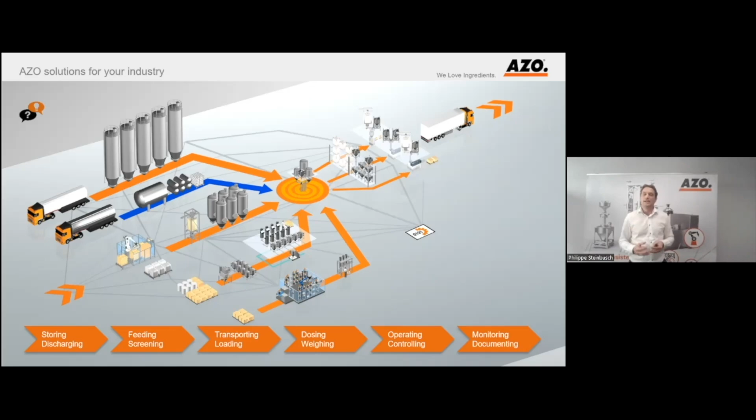So this was a little bit the introduction of AZO. But all these process flows, if we take them to a pharmaceutical application, for example, if you want to make OSD, you have different smaller components, and how can we, for example, use robots to take care of these process lines?

I want to share with you today an application we did for one of our customers. The application was based on this first requirement, which was a special vessel that needed to be filled. We needed to bring it to a mixing system, and then we needed to discharge it. So what were the requirements?

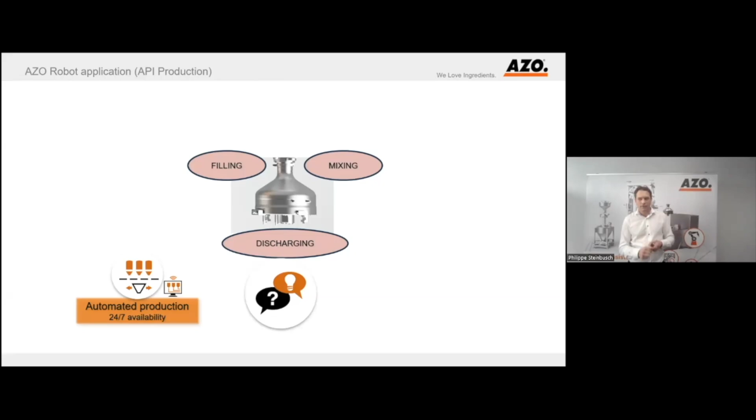First, the customer wanted an automated production. We needed a lot of availability, no stops, not related to operators, and we needed to have really a continuity and a continued production.

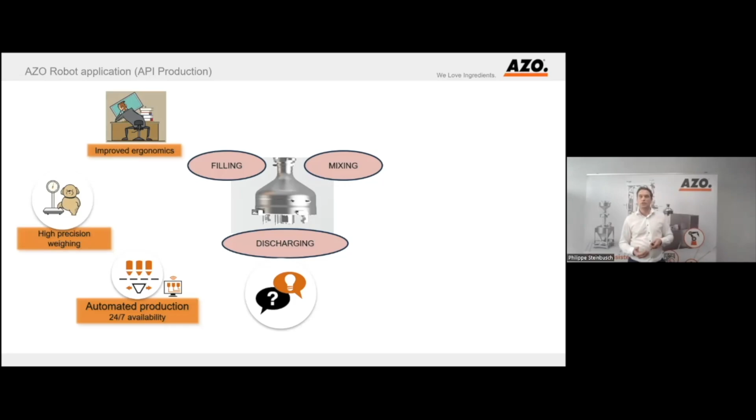Second, we needed high precision. As you know, we are talking about pharmaceutical components, so we need to be careful that the amounts are weighed with high precision. Of course, ergonomics is also important—operators cannot lift too much, so we need to take care of that as well.

The next requirement was containment and hygiene. Most pharmaceutical products are not easy in terms of containment, and often they are also explosive. We need batch integrity, so we need cleaning of the equipment. We need traceability—we need to know what's going inside, what's coming out, and whether it's mixed correctly. And finally, the software needs to be compliant according to GMP regulations.

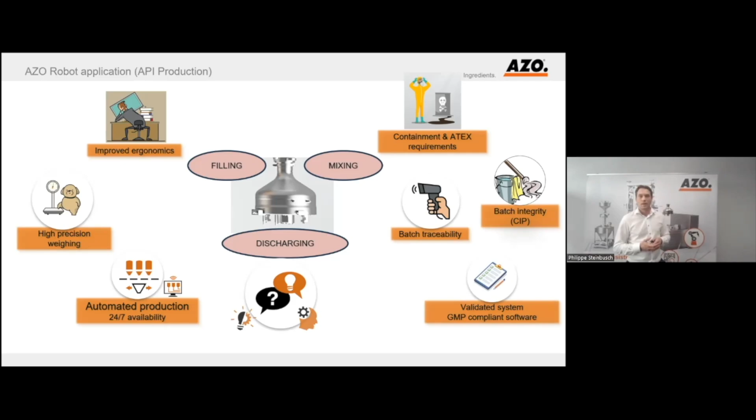So what was the idea? We had this vessel, and how were we going to handle it? This vessel is very heavy, around 100 kg, so it's not so easy to manipulate. The idea came to use a robot system to do all the work and to have an automated production.

Before I show you a little bit of detail about the different equipment, I want to show you this video. It was recorded during validation, and I sped it up to show the movement. It's not the real-time movement, just to show which movement the robot performs during the whole production cycle.

Here you have the robot in the middle. He scans—you see a green light—he can scan a certain vessel with a barcode. He takes a vessel and places it on a mixing stand. During that time, he's free and can move around, so he can take another vessel. In this case he scans again the vessel, wanting to be sure he has the right one every time, and places it on another position where, for example, the product would discharge into another position. I will explain later how these different positions work and what they do.

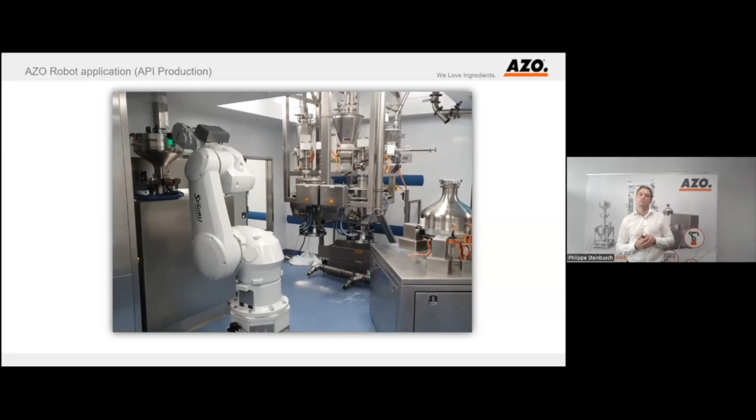Then the robot takes another mixing vessel from another position and can move it freely around. As you can see, you can have different mixing vessels in that area, and the robot takes care of all the movements. Finally, the last movement is that the robot takes the empty vessel again and places it back in the filling position.

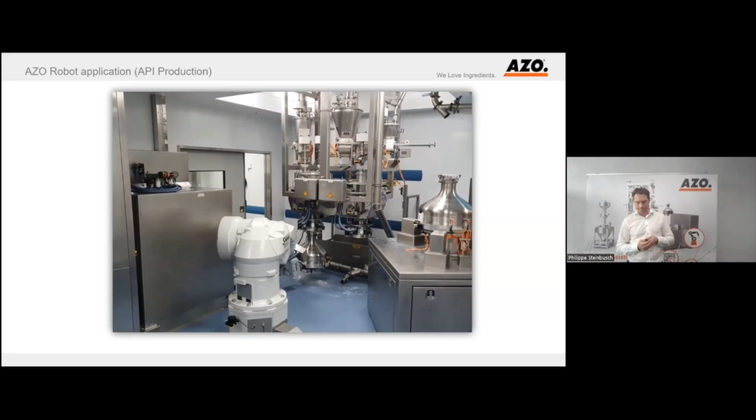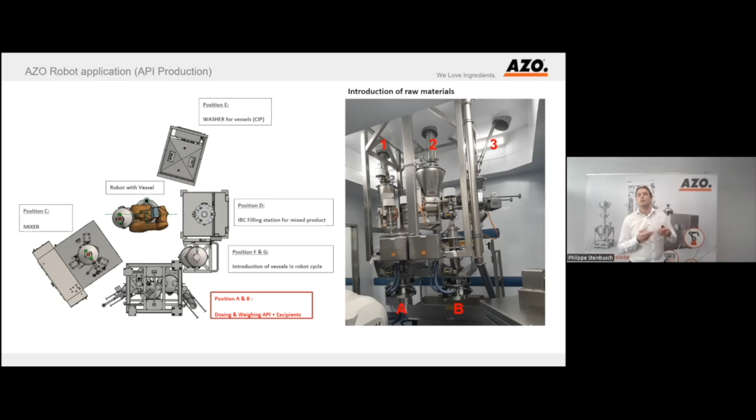So if we go a little bit in detail, we have the different raw materials. We need to add them to the mixing vessel, and in this case for this customer, there were 3 raw materials that needed to be mixed together, marked by 1, 2, 3. And we have 2 filling positions, position A and position B, and the robot can place a certain vessel on position A or B.

These raw materials needed to be dosed, so we used feeders, dosing machines. For example, we have 3 dosing machines that can fill together. 2 feeders can dose in point A, and 1 feeder can dose in point B. And we have a very high accuracy, so these feeders can dose at a 5-gram accuracy or even better.

The feeders dose into a hopper, and this hopper has weighing cells and also an automated calibration system. So before we dose, we calibrate the whole system again to be sure that we have really the correct amount, and then we can dose with a high accuracy. Once the product is dosed, we transfer the whole product into the mixing vessel, which is located underneath.

These dosing systems have very small volumes. As you can imagine, if you want to produce during a certain time, for example a few hours, you don't have enough product in these feeders. We didn't want to make the volumes bigger, because we wanted a very correct amount, a very high accuracy. So we will refill these 3 feeders with chute tubes, located where you see 1, 2, 3. The refill system is located on the level above.

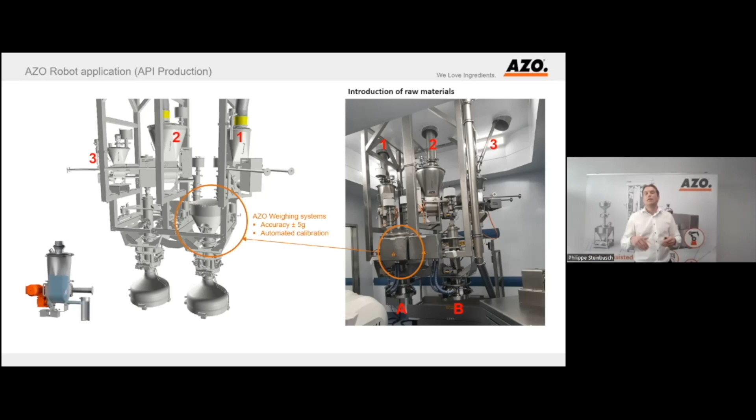So if we look into detail how it looks above on the first floor, we have these different filling systems. We need a certain buffer because we want to have as few operators as possible around taking care of the system, since we need a very high availability, and we also need to take care of cleaning the whole system.

Once the production is completely finished, we can dismantle every product contact piece and bring it to a washing area. But that means also that if you have a buffer, you cannot easily remove it. So in this case, we used an IBC as buffer, placed on a fixed position, and we can completely fill this IBC, which is then the buffer for a certain number of hours. Once it's empty, or when we are finished with production, we just remove the IBC and clean it in a washing street or washing area.

Here you see, for example, that we need to refill them. And usually when you talk about pharmaceutical products, they come in as raw materials, and these raw materials are usually in drums or bags. So we have position 1 and 2, filled from drums. And how do we fill them? Because it's not so easy to manipulate drums.

We have designed a lifting column which has a clamping system. So basically you only place a drum in a clamping system, the lifting column clamps the drum, lifts it, rotates it, and swivels it to the position. And by means of a split valve technology, we can connect the drum to the IBC.

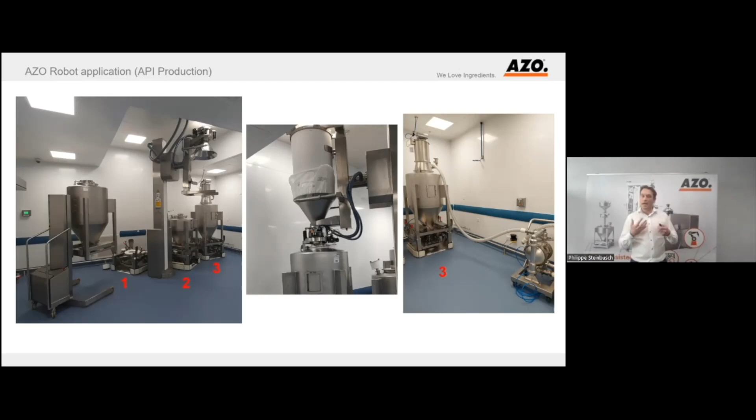The third product was filled by means of a conveying system. So we just take a suction lance and we can empty the bag into an IBC. So this is how the raw materials were managed. Operators have less effort to refill the system, and the system refills itself and doses itself in an automatic way.

We have dosed the product, it goes to the mixing vessel, it goes to the mixer, we're finished, and then we need to empty this mixing vessel into the next step. This mixing vessel was emptied into an IBC, and this IBC can contain 4 to 6 times a mixing vessel. So once this IBC is filled, it gives a signal to the operator, and the operator needs to replace the filled IBC with an empty one.

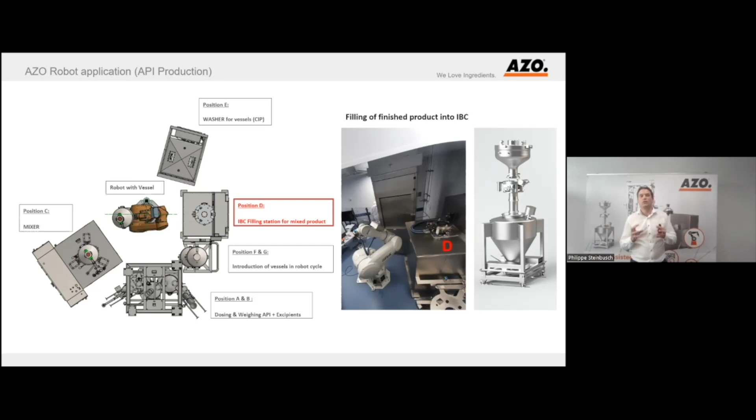So in order to avoid the robot stopping, because we cannot enter the room—the room is completely closed so that no operator can enter—we designed a system to access the IBC without the robot stopping, so the robot can continue cycles. From that door, as you see there, the operator has access to change the IBC. So I have two doors.

The IBC is placed on a weighing scale so that we can monitor how much is inside. And once the system gives a signal to the operator to change it, which happens every 4 or 5 hours, we replace the IBC.

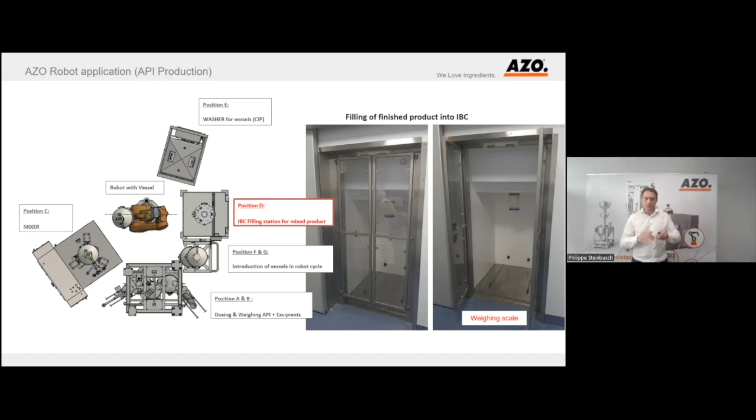Once this is done, of course the mixing vessel—in this case it was a requirement to clean it between each mixing step. Before refilling it again, we needed to clean it, to CIP it. And there also, we cannot have an intervention of an operator, so the robot places the mixing vessel into a washing station.

And this washing station contains also a split valve technology so that it can dock automatically, clean it, CIP it, and then dry it again so that the mixing vessel is ready to use again at the first filling stations, A and then B. So this is the complete cycle of the robot, and he can just do this endlessly the whole day.

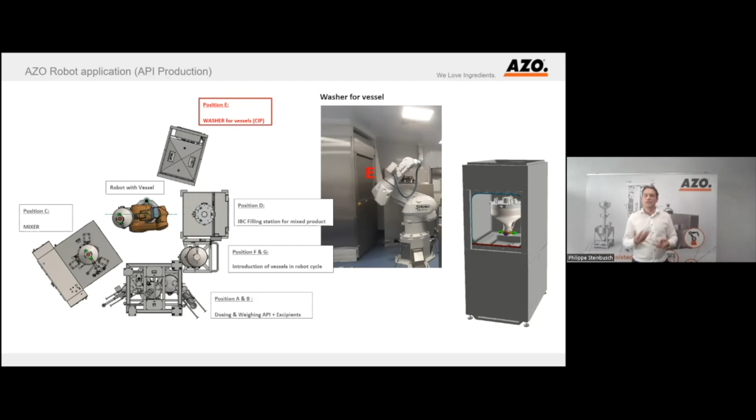What you need to take care of is, of course, that sometimes you can have a non-conformity of a mixing step or a washing step, so you need a position where you can remove a vessel. But also when you start your production cycle, you need to introduce a lot of vessels, so you have a fixed position needed to remove or place new vessels.

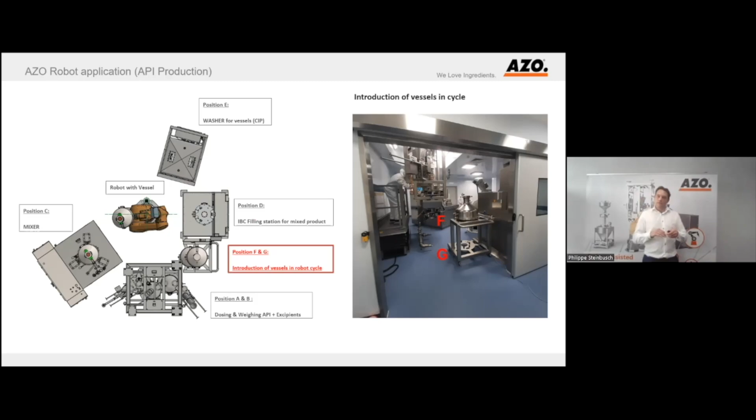So this concludes a little bit the different steps. And if we look into the requirements requested by the customer, we have the automated production cycle, which is okay—all the steps you see here could be managed. So automated production cycle, because the robot does all the job.

We have high precision weighing. We also have an automated calibration system. Ergonomics—the operators only need to place drums on the clamping system or empty a bag with a suction lance. So it's really easy for the operators.

Containment and ATEX requirements: because we have a completely closed system, we have a certain containment level, and ATEX also—it makes it easier because we have ATEX requirements on the inside of the system, but on the outside it's limited because the system is completely closed.

Batch integrity: due to the fact that you can CIP the intermediate mixing vessel after each cycle, we can guarantee a certain integrity, and also we can clean the whole system so everything is dismantleable and can be cleaned separately. So we cover that step.

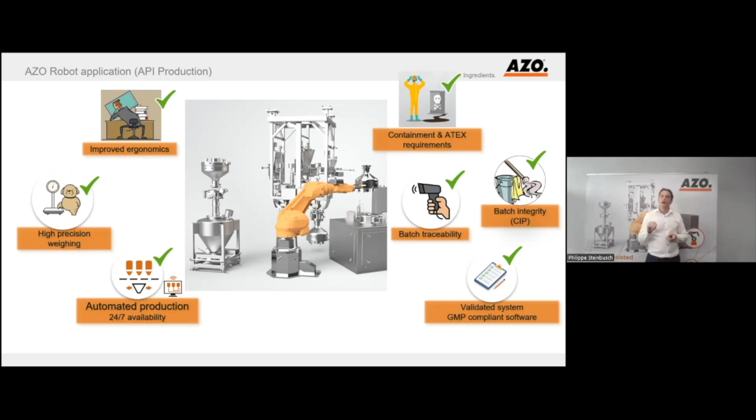Batch traceability: as you could see, the robot has its own scanner on the arm. So at each step, he can scan the vessel and double check if he has the right one and if the movement he does is correct in function of what needs to be done.

The whole system was covered by an AZO automated software, and we are GMP compliant, so the software was 21 CFR Part 11 compliant, so we could cover the whole GMP regulations with that.

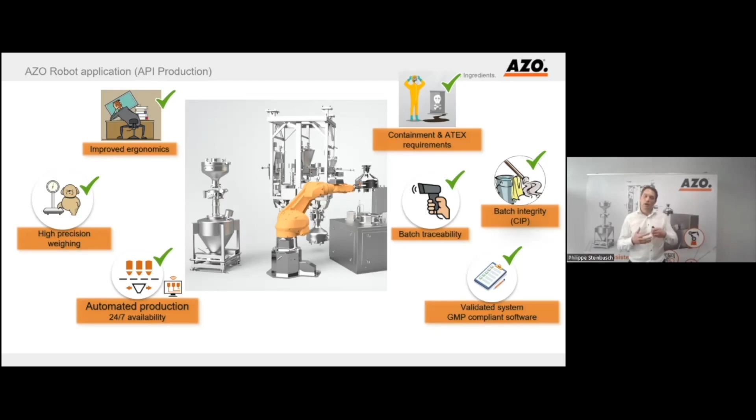I hope I could give you an insight into what is possible in API productions. And of course, this is an application for one customer. As you can imagine, every customer has its own process steps, maybe more or fewer ingredients, another mixing system, another part where he wants to fill or empty the vessels. So everything is possible, but this gives just an insight of what is feasible in the API world.

I want to thank you for the presentation, and if you have some questions, I will try to answer them as much as possible.

Before I jump into the topic of powder rheology, what I would like to discuss is actually not powder rheology as a whole term, but rheology per se, because I expect a couple of people in the audience who are not particularly familiar with this rather exotic field of science. So rheology is the flow of matter of any material, actually. This is what we are studying with rheology. I say any material because really anything can flow. Obviously liquid flows, solids flow and so on, but also powders flow. This is why there's this need for powder rheology.

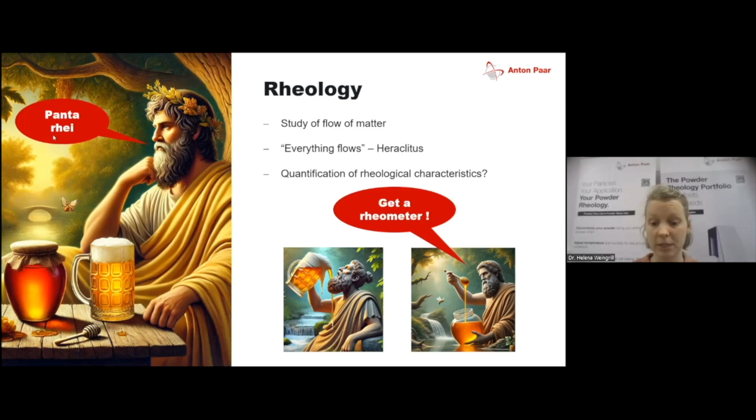However, if you do the same thing with honey, it will also flow, but at a different pace. And this is exactly where rheology comes into play, because here we actually need to quantify these differences in flow behavior. This is where Heraclitus, with his famous saying panta rhei, will not help you anymore, and he would tell you to get a rheometer for quantifying these rheological characteristics. This leads me to my next slide - I would like to quickly explain what a rheometer does. Basically, a rheometer forces a material to move, either in a linear way, in a rotational way, and so on, and it measures at the same time the effort which is necessary to make the material move.

And by measuring that, what we get out is viscosity. Viscosity is this term which determines my flow behavior, and we get many more results. However, viscosity is the most important part to get out. Let's take a look at the hardware, how this is done.

Well, we see our rheometer here. The heart of the rheometer is always its head, because in here we have an engine. This engine, on the one hand, forces my material to move, and on the other hand, it detects the signal, which is then used for calculating the viscosity and other magnitudes. Attached to the engine, we have a measuring system, and this is also of importance because this measuring system will have to be adapted to the material in interest.

I've mentioned that we can measure how solids flow, how liquids flow, and also how powders flow. You can easily imagine that we would need different measuring systems to make a powder flow as opposed to making a liquid flow. Besides those two parts, which are definitely the main parts of a rheometer - the engine and the measuring system - what we can adjust or add as well is the surrounding temperature with a temperature device, a humidity generator.

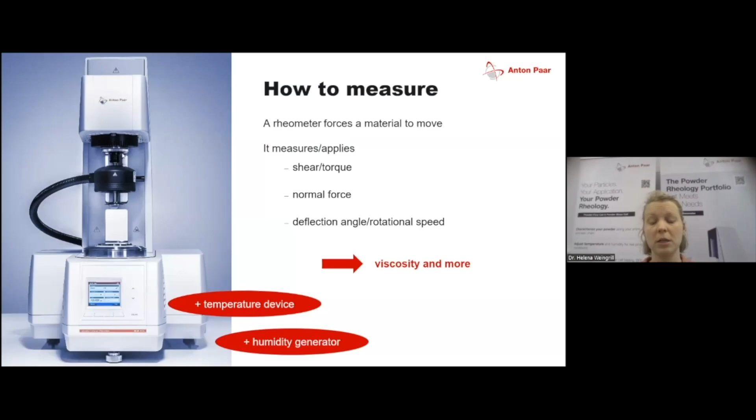And this is one of the most important takeaway messages of today: you always have to set the surroundings during the measurement to exactly what you see during the process. So in general, powder rheology is about imitating powder handling processes. But if you're not setting the temperature right, humidity and so on, the applied pressure, you will never get representative results. So please keep this in mind. Flow behavior heavily depends on the temperature and the humidity the material is seeing. And of course, we can add our powder cells.

So let's actually see why it is necessary to look at the flow behavior of powders themselves. The thing is, there are so many impacts that let powder flow differently. We can categorize them into internal impacts and external ones. Let's start with the internal ones. Those are basically the impacts where we, as powder rheologists, can do nothing about. Those are the given physics from the particles that make up the powders.

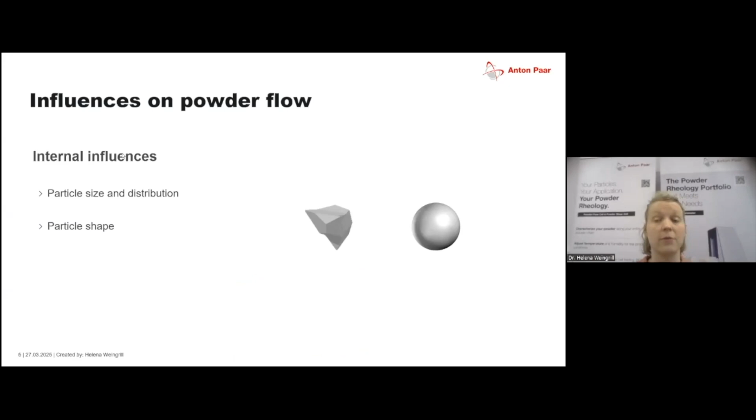Well, there's a certain particle size which impacts the powder flow. Then, of course, the shape. Powder flow is always about friction in between particles. If you think of it, what happens during powder flow? Those particles, they're moving on top of each other, meaning there is friction in between the surfaces of the individual particles. Now you can easily imagine when sliding over particles with edgy shapes like that, there will be more friction as opposed to sliding over particles with a round shape. So this is how we have an impact here on powder flow.

Same thing is for surface texture - it also accounts for the friction in the end. There might be some gas molecules adsorbed to the surface of the particles, also impacting powder flow. So those were now the given things of the powder where we, again, as a rheologist, can do nothing about.

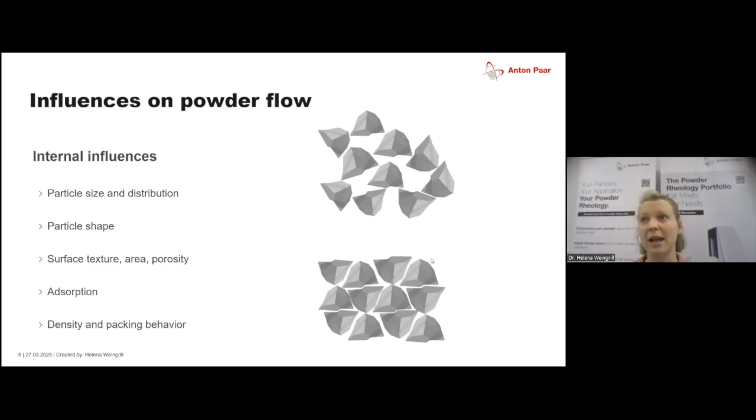But now when it comes to imitation of the processes, which I mentioned - because it's always imitating a process - the external impacts are now the ones where we, as powder rheologists, can really play around to get representative results of my powder flow. For example, the applied stress: what amount of stress does my powder see when it flows? This heavily impacts the flow behavior of my powder.

Then humidity. Just imagine now that these little droplets build liquid bridges in between the individual particles. They pull the particles together, meaning we increase the interparticle forces, which will in return have a huge impact again on the powder flow. So this is something we will have to consider during our powder rheological measurements.

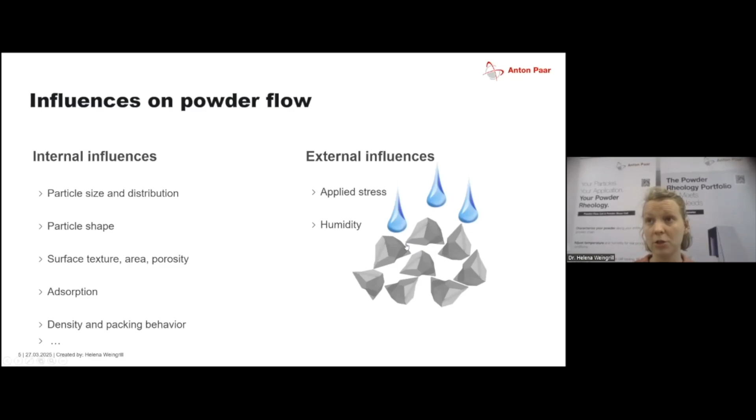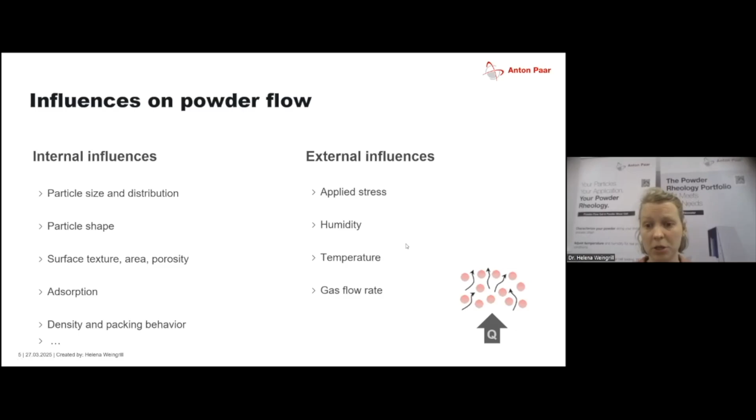Then, of course, temperature. Just think that your powder is, for example, a polymer. You're transgressing the glass transition temperature, the polymer particle softens. Again, this will impact the friction in between the individual particles, which again changes my powder flow. Then also if my powder is fluidized or not, if I'm doing pneumatic conveying and so on. So those are now the external impacts where we, as powder rheologists, can simulate the process.

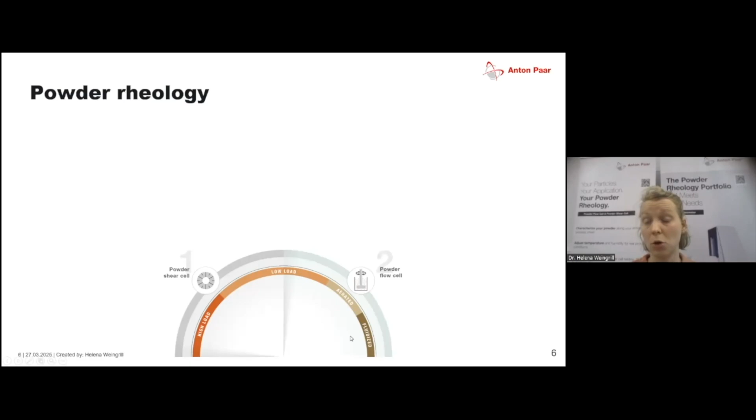We categorize them according to the load of the process we're trying to imitate. So for high load to medium load applications, we have a powder shear cell, classic for measuring flowability and so on, which we will see later. There we can play around with the humidity and temperature.

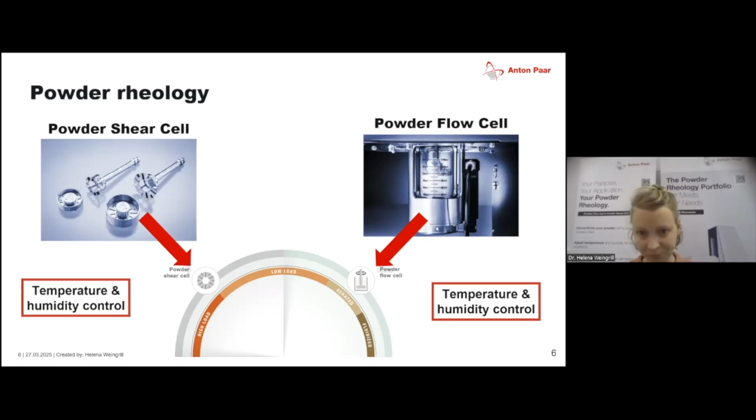Besides that, if we want to go into processes where we fluidize our powder, for example fluidized bed reactor or pneumatic conveying, then we would use our powder flow cell, because here we can nicely imitate the fluidization process. We do that by introducing pressurized air from down below into this powder flow cell. There we can also play around with temperature and humidity to a certain extent to really get representative results in terms of the powder flow behavior.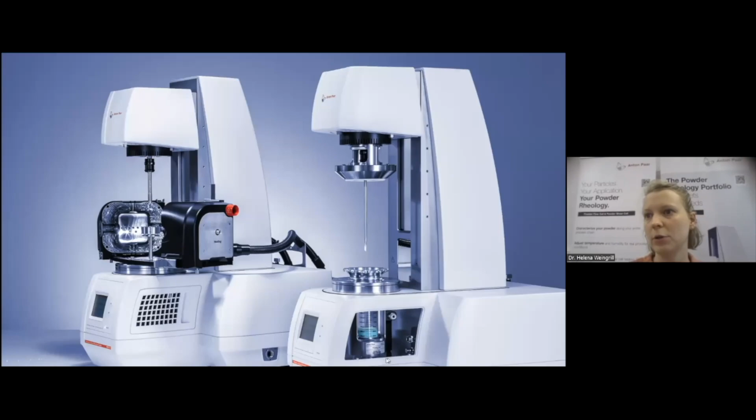This is what our two cells look like on the rheometer. On the left-hand side, we have our shear cell in combination with a temperature device, and on the right-hand side, we have our powder flow cell where we can fluidize our powder by introducing pressurized air.

So there are a lot of powder handling processes out there. That's why there's also a lot of methods for imitating those. Those are the well-established ones. We're not going into detail through them right now. I just want to point out that we cover all of these, and we can look it up online. Classic things which are used a lot in pharma, for example, basic flowability energy, the BFE, we can measure that, as well as shear testing.

But the focus today is definitely on the pharma industry. So let's see where exactly along the process route we can apply powder rheological testing methods from our rheometer.

The goal always is, you have some kind of active ingredient, and what you want to do is dose it correctly into the system of a patient. However, most of the times this dose is really low, it's a couple of milligrams sometimes. So it doesn't go directly. We have to take a couple of different steps, a detour to get it there.

So we mix it with an excipient, we blend it, get the mixture. Then if the flow is not well enough, we have to do granulation. Then still we have to dose it, maybe in a pouch like we're seeing here. The pouch is then opened again, we empty it, we dissolve it in water, and then it can be swallowed. This is one way of dosing it into the system of the patient.

Another way would be that we start here again with our granulated powder. We tablet our powder, in this case into a fizzy tablet, which we can dissolve again, and again we can dose it to our patient. If we want to stay with tablets and not a fizzy one, we can also swallow this tablet directly. So we already see there are a couple of process steps until actually the active ingredient gets to my patient. Let's see where and which methods from powder rheology we can apply here during those process steps.

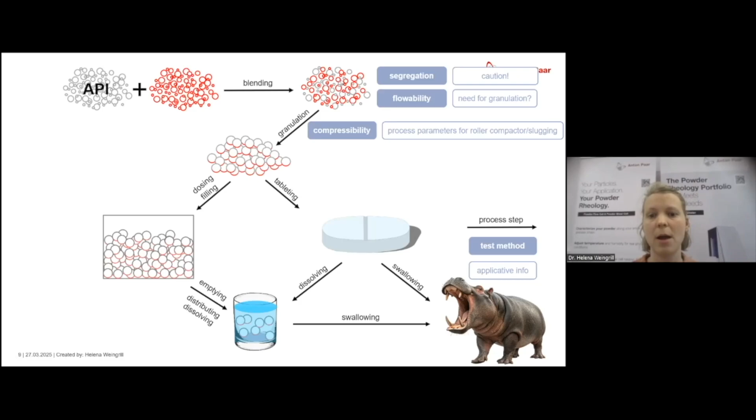If we then have our granulated powder, again, segregation testing comes into play, not because now of the different ingredients and concentrations, because in this state the API should be evenly distributed in the granulated powder. However, what we often get from our customers is that if they are facing problems with different particle sizes, because you will not have the exact same particle size in your granulated powder, those particle sizes can segregate as well, which only then in a result will cause issues when you're dosing it. So segregation of a granulated powder is of interest when we're then dosing it, in this case into a pouch.

However, if we're dosing it into a different container, we might want to check flowability and wall friction, because this will tell us how well the powder can be dosed, especially if I'm changing a supplier or changing a powder. Then if I'm filling it into a pouch, the deaeration time test is of interest. We will talk about this one in detail later, because it's not so well-known. Basically, it tells me how long I will have to wait until I can seal my pouch.

Once it is in the pouch, of course, I have to rip my pouch open and empty it again and put it into a solvent. What I want, if I'm pouring or emptying my pouch, is for no particles to be stuck on the inner side of the pouch. So with wall friction, I can look into the interaction between the powder and the pouch material.

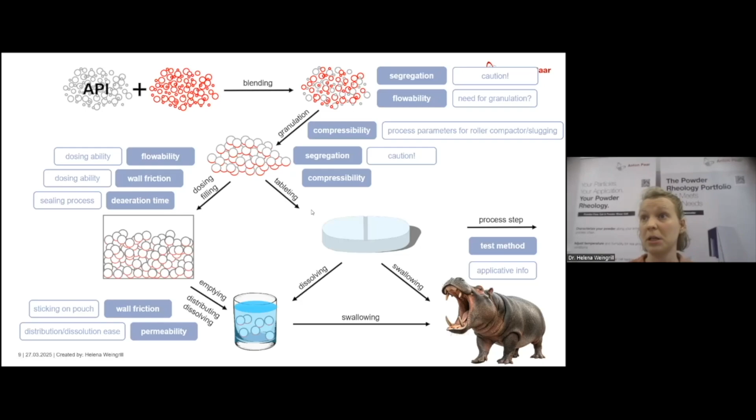Great. If I decide to not go into a pouch and keep the powder as it is, I want to go into tableting. I mean, obviously this is compressibility. There I want to look into compaction behavior. I can take the process parameters then to transfer them to my tablet press to set the parameters correctly for my tablet punches.

Then again, I can measure here permeability. In this case, it is not because of the distribution, but actually when I'm filling the die in my tablet press, I want to make sure that any entrapped air can also go out of the die. I want to make sure my powder is permeable enough to not form voids inside my tablet.

Then one last measurement method is, if I then go into fizzy tablets manufacturing, well, I want to look into the porosity of my tablet. It will tell me how easily it will dissolve. And this is something I can measure with our newest measurement method, which is envelope density.

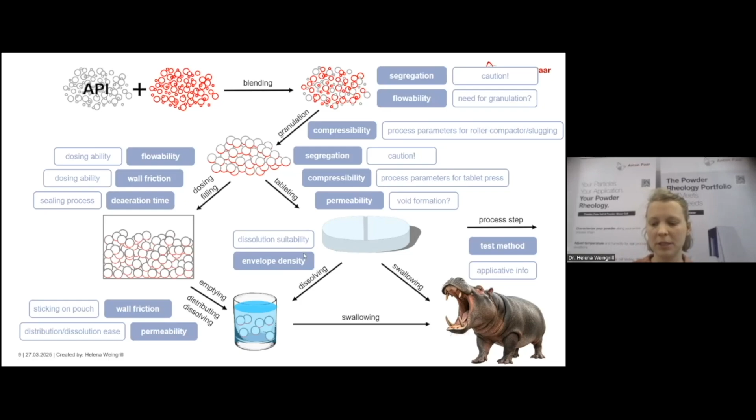So, you already see there are a lot of measuring possibilities in this really, let's say, facilitated process route. So since time is limited, we will only focus on those 4, where I will give you concrete examples which we measured from customers. So we look into flowability, deaeration time, compressibility, and envelope density.

Great. I will start with flowability because this is, well, the most typical one if we talk about rheology. Before we start with the concrete results, I would like to show you how we can measure flowability. Well, first of all, shear testing. It is typically used for medium to high load applications. For any dosing unit, this is the perfect testing method.

Basically, what you measure is the flowability as a function of applied load. We will see that on the next slide. We can do temperature and humidity controlled measurements here.

As opposed to that, also basic flowability energy, we can do that. This rather goes into quality control measurements. Also here we can apply temperature and humidity. And the third version we offer for flowability test is the cohesion strength. What I like to point out here is that it is really highly sensitive, and it has such a short testing time, which is smaller than 4 minutes, even smaller than 3 minutes if I think of it.

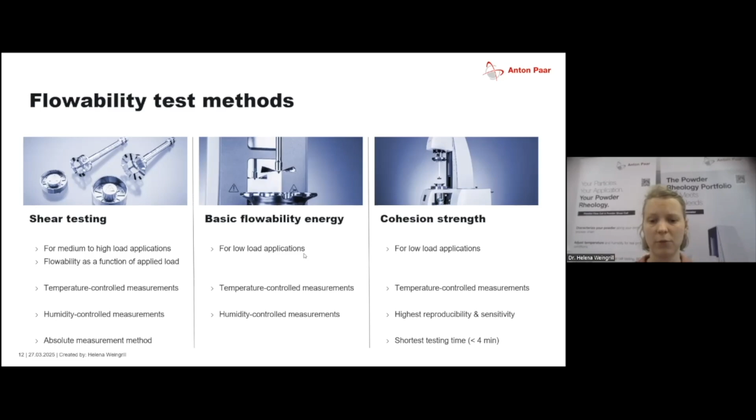Before we start now with the results, I would like to point out that our software is completely compliant with 21 CFR Part 11, so it does all the audit trail and the access control.

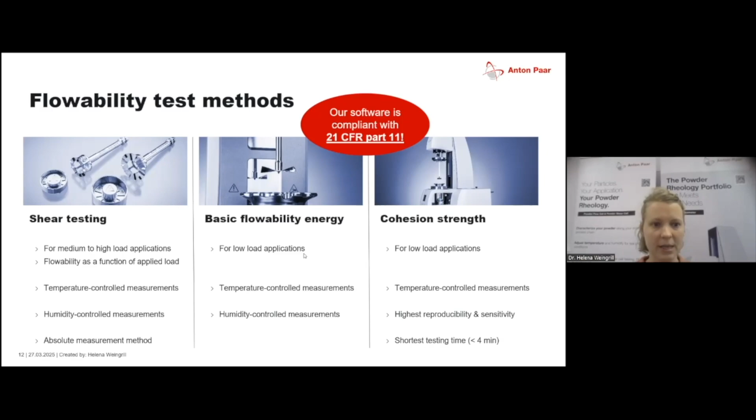Okay, great. So in this case, I would like to talk about shear testing. Real quick, how does it work? Well, it measures the flowability as a function of the applied stress. How does it do it? Well, we calculate the so-called FFC coefficient, the flowability coefficient.

And this always puts into relationship the applied stress, what stress my powder sees, and what is the internal resistance of my powder towards this stress. So what is the strength of the powder? So the flowability is always depending, in this case, on what stress the powder sees. If we now divide those two magnitudes, well, we get the FFC value, and basically, most of the time, it is displayed as this.

It categorizes the flow behavior between free flowing and non-flowing. The higher my FFC value is, as we see here, indicated by the FFC equals 10 line, the more free flowing it is. Because at this point, basically, the applied stress to the powder is 10 times greater than what the internal resistance towards flow of my powder is, right?

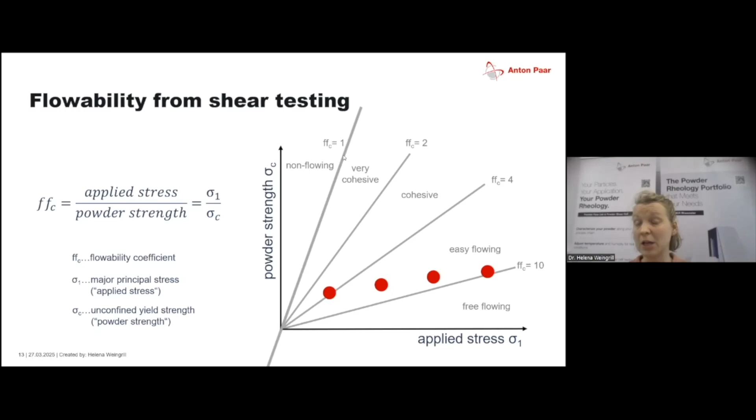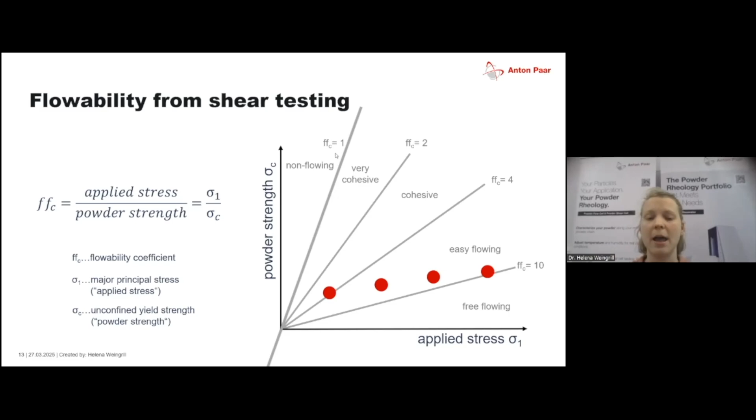These flowability charts are really nice to look at, but the most important line here, I like to point out, is this one, because at this point, at an FFC value of 1, the strength of the powder equals the applied stress. So exactly here, we have an equilibrium of the strength and the applied stress, and there my powder will not flow anymore, just because it is too strong to be moved by the applied stress. This is really the most decisive point, because here I can expect a lot of blockages or jamming taking place in my dosing unit.

Coming to the results, we tested Neo-Citran, everybody knows it, right? You take it if you suffer from influenza, if you have the flu, you have some symptoms. And what we measured there is the flowability at different relative humidity levels.

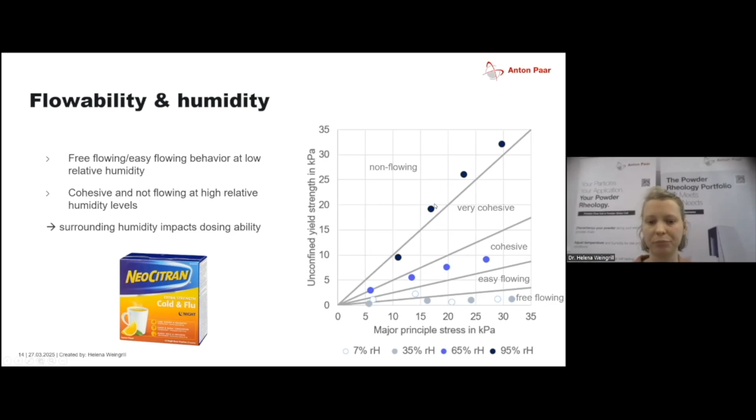This was it about flowability and dosing ability. Let's go to tableting, since this is such a big topic in pharma.

We already mentioned that compressibility is the best choice for imitating this process. What does the compressibility test do? It's a really simple test: you press on your powder, you increase your normal stress, and you see how the volume changes. You nicely see that if you put more normal stress, in terms of more weight, onto a powder, the volume will change more. Typically, it is expressed as a function of the bulk density, meaning the bulk density increases the more you compress it, simply because less voids are available in the powder and it is a denser material.

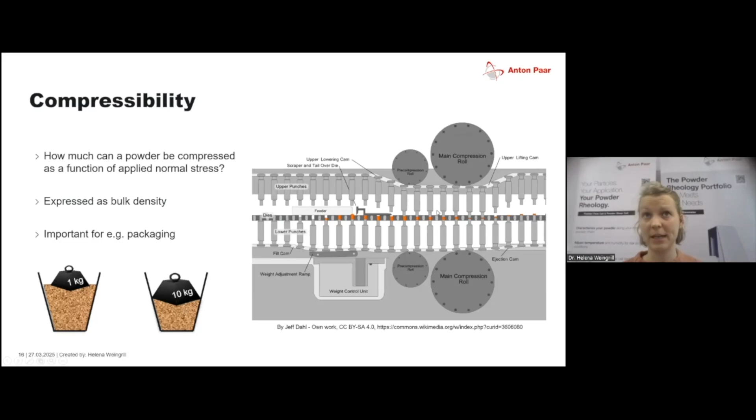Typically, we use this for packaging, because I want to know how much mass can I fit into a defined container and a defined volume. However, when thinking of the tableting process, we nicely see that exactly this compression happens here in my tablet press. So it seems to be the perfect fit for imitating this tableting procedure.

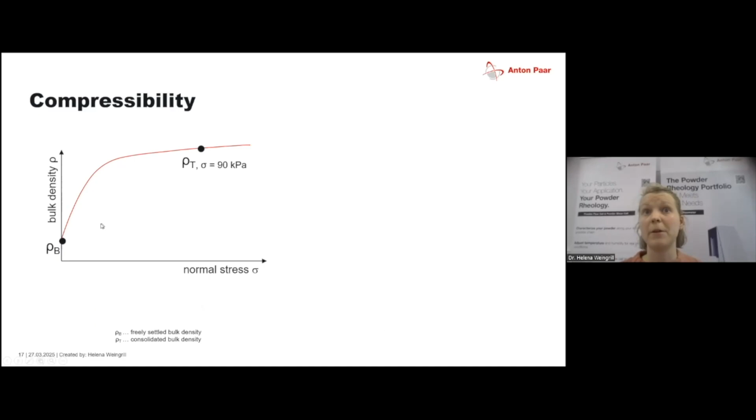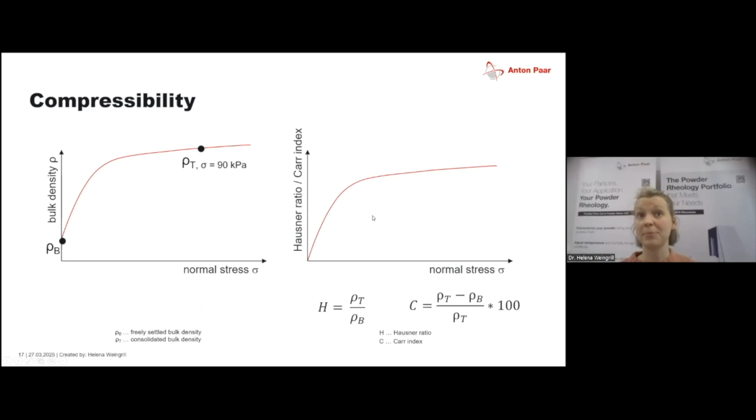As I mentioned, what you get as a result is the bulk density as a function of the normal stress. If you're now interested in comparing, for example, the change in bulk density at a given normal stress to the initial bulk density, when the powder is settled freely, then we can go on to Hausner ratio or Carr index, which simply eliminate the absolute value of the bulk density, and you will find out in percent how much this powder can be compressed.

Let's go to the concrete results. What we tested were 3 different microcrystalline celluloses, one of the most used excipients in pharma. They were pure samples, however they differed in their particle size distribution, and we can already see the differences here on the right-hand side. We tested up to 2.5 megapascal, and we see that even though chemically those MCCs were completely the same, they show different bulk densities.

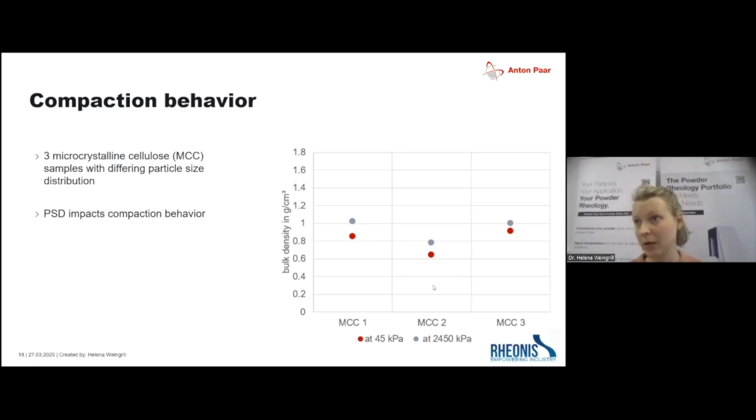What does this mean now? Well, my particle size distribution definitely impacts my compaction behavior, even though chemically it's completely the same. And if, for example, I am changing my supplier for whatever reason, most likely I will have to reset the parameters for my tablet press, and my punches will have to work differently. So please keep this in mind: MCC1 must not equal MCC2, even though chemically it's seen as the same product.

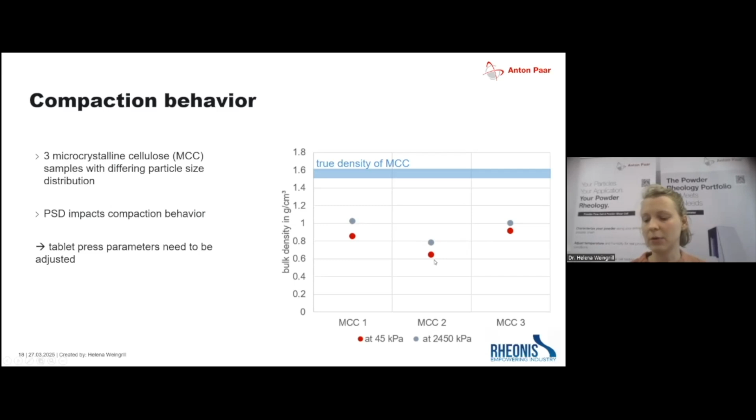I also plotted here the true density of MCC. We see it's far above the one from the bulk density, which is of course expected, because here we still have voids in between the individual particles. So that was really basic compaction behavior.

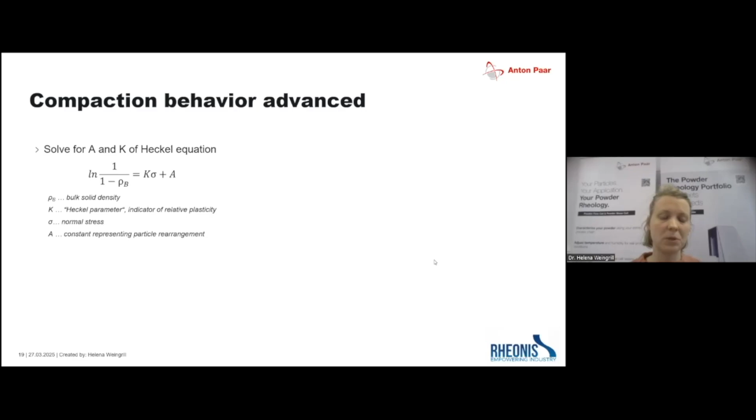What I'd like to point out is that our rheometer is such a high resolution tool that we can do in-depth analysis of compaction. So what we did here was solve for the Heckel equation. I'm really not the expert for the Heckel equation, but basically it tells you the three stages of compacting a tablet. During the second stage of the deformation regime, you can fit a linear graph, and if you solve for K and A, this will tell you how well a powder can be deformed, its plasticity.

Again, please don't ask me about the Heckel equation. I'm pointing out that our rheometer is able to have such high resolution during measurements that it can also go into R&D measurements.

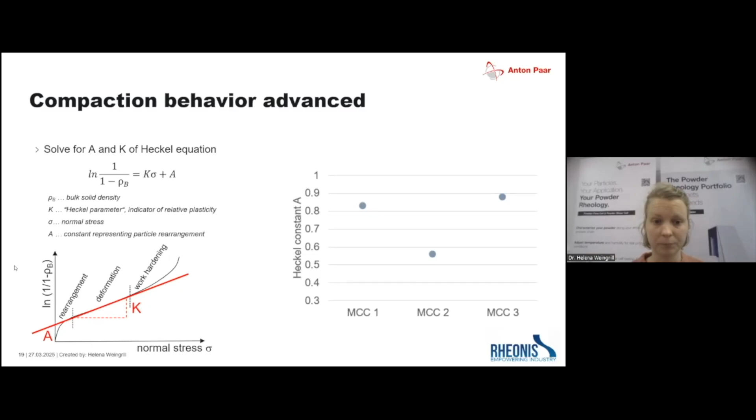This already leads me to the next measurement method, which is the newest one in our powder rheology family: the envelope density. If you hear this term for the first time, please ignore the word 'envelope' because it is rather confusing. What it really does is measure density. We can measure the density of an object of complex shape in our rheometer.

Typically, density is always calculated as mass divided by volume. Mass is easily determined via a balance. However, the volume of a complex shape needs to be measured. If you have a perfect cube, you can calculate the volume, but most of the objects we're interested in have a complex shape, something like this, and there the volume has to be measured, not calculated.

So how do we do that? We place it in our powder flow cell, and we compare the volume of the powder first in there to the volume of the powder after immersing this complex object into it. The difference between the first volume measurement and the second equals exactly whatever this new object pushed out. This difference equals the volume of my object.

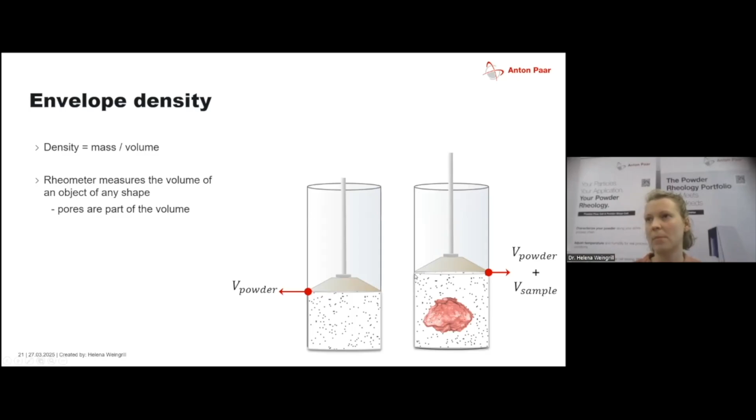If you think of it, you have a glass of water without any ice cubes, you add some ice cubes to it, then suddenly the level goes up—typical Archimedes principle—and this difference equals the volume that was immersed, the displacement volume.

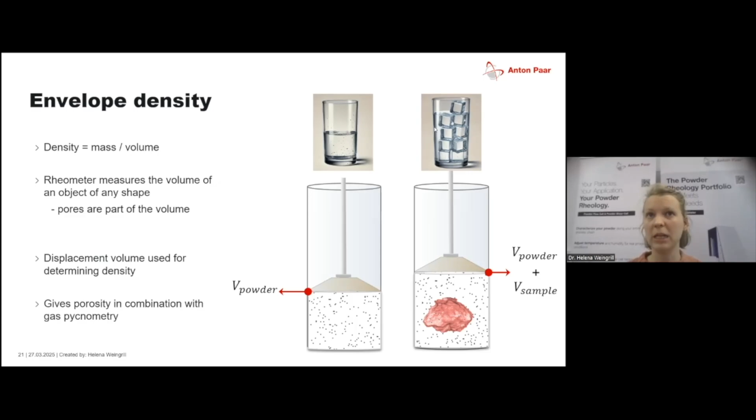So we're talking about porosity. How do I get from this density measurement to porosity? I have to combine it with gas pycnometry measurements, because this always gives me the true density of a material. It takes away all the pores included in the envelope measurement, and then we can calculate porosity. This is exactly what we did with two different tablets.

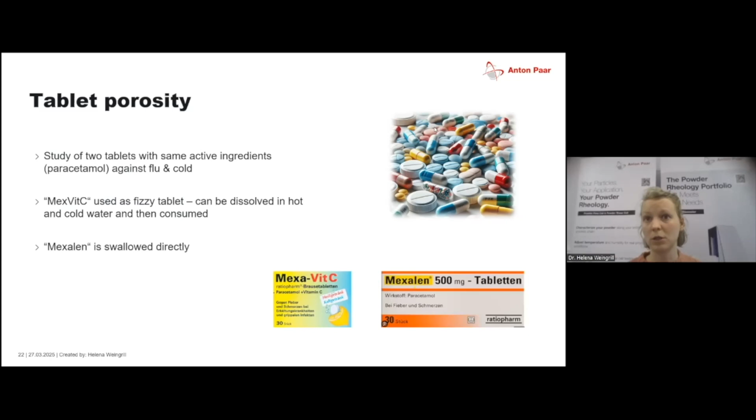We looked at two pills that actually had the same API in there, paracetamol, again against flu and cold symptoms. One was a fizzy tablet that you dissolve in water, and the other was one swallowed directly. However, both had the same active ingredient in there.

This already leads me to the last measurement method I would like to talk about today, which helps us set the correct parameters for filling powder into a pouch or another container. So this is a little teaser. Finally, we are talking about fluidization.

We nicely see how we can fluidize a powder here in our powder flow cell, where the pressurized air is coming from down below. And this is what we will be using for determining the so-called deaeration time.

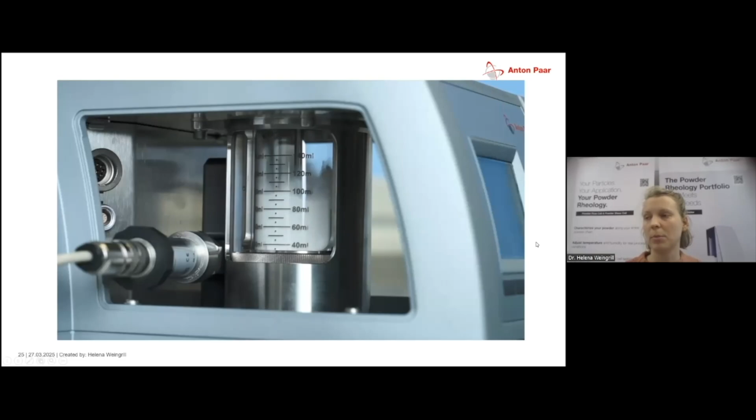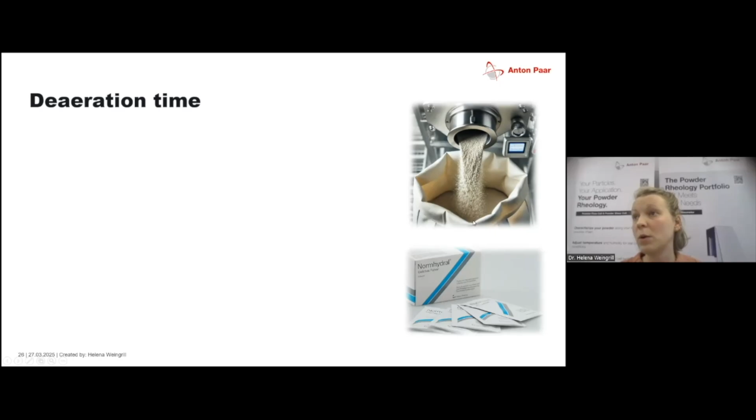Why is this of importance? Well, if you're filling a powder out of a chute into a bag or container, right at the moment the powder is leaving the chute, it is being fluidized because it's pushed against the air. What I want to know before I can seal a pouch, this is what we measured with this Normhydral powder, is that the powder is not dust anymore. Everybody knows that if you fill a powder into a bag, there's dusty air left. However, if those particles causing this dusty air are still there, I cannot seal my bag flawlessly because those particles prevent that. So what I want to make sure is how long it takes until the entire dusty air settles.

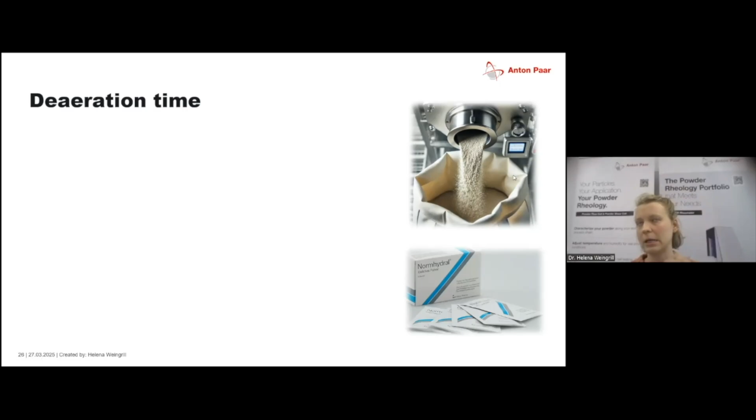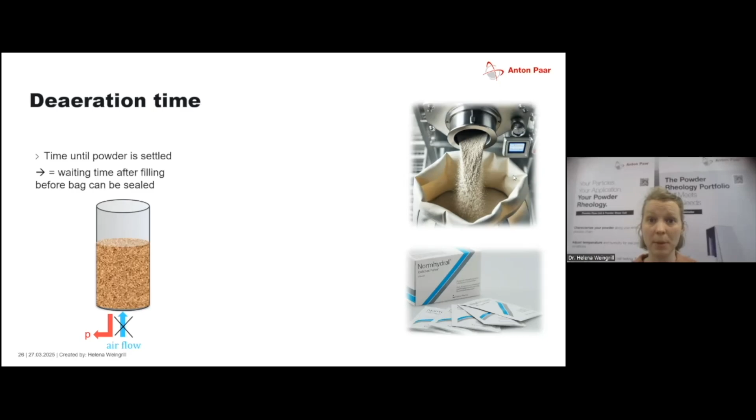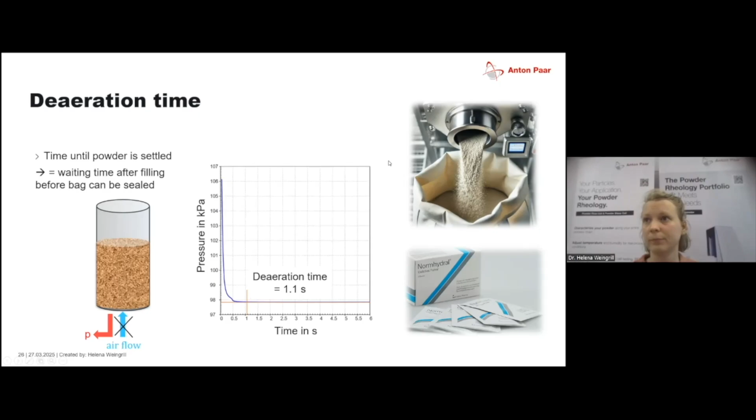Okay, great. Thank you. This was it. Feel free to ask any questions.